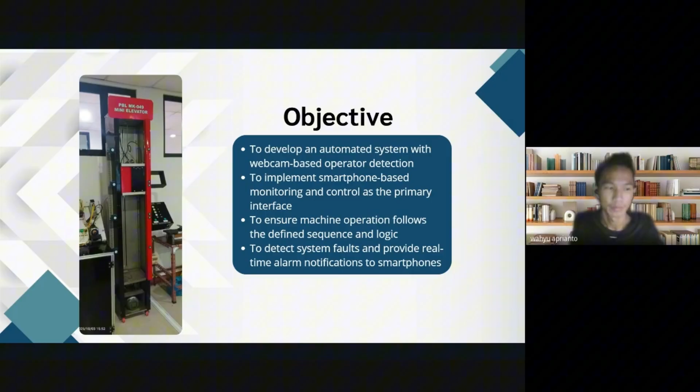Thanks, Wahyu. I'll be explaining the objectives we should achieve in this project. First, develop an automated system with webcam-based operator detection. Second, implement smartphone-based monitoring and control as the primary interface. Third, ensure machine operation follows the defined sequence and logic that have been calculated before. Fourth, detect system faults and provide real-time alarm notification to the smartphone.

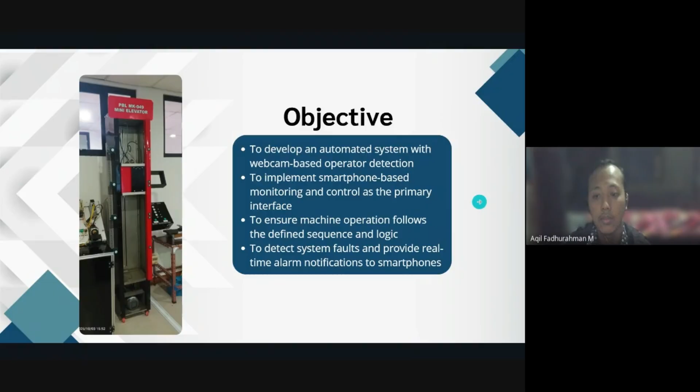Henry Rahmana is focusing on analyzing the existing elevator wiring system, identifying I/O addresses, and sharing his information with other members so everyone can support the PLC programming and wiring process.

Third, Mariana Ulfa Santi Safitri is focused on developing the machine vision system, specifically implementing face detection using the Haar cascade algorithm, which supports our first objective. Fourth, Wahyu Dwi Aprianto.

Wahyu Dwi Aprianto works alongside Henry in analyzing the wiring system and assisting with PLC wiring and system integration. Fifth, Dika Alfat Rizky was responsible for building the IoT environment using Blynk, ensuring the ESP32 could communicate properly with the PLC and smartphone interface.

Lastly, Muhammad Faras Hakim was responsible for testing the PLC program, especially for the elevator's up and down movement. However, during the project he participated in another event, which required me to temporarily pick up his task. In the end, Hakim still contributed well by helping with wiring and program testing. Okay, thank you, that's all from me.

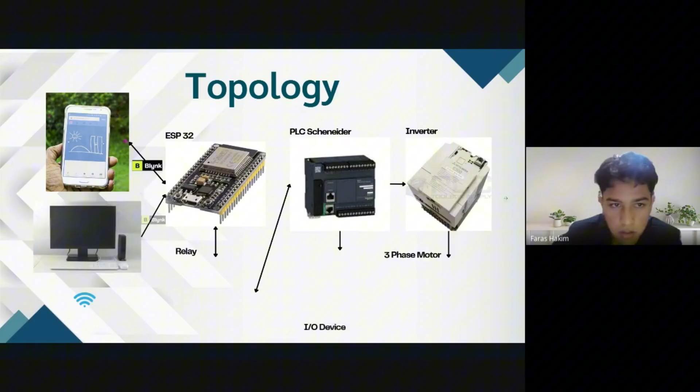Okay, this slide shows the system topology used in our project. The system is centered on the ESP32 as the main communication and control interface. The ESP32 is connected to the Blynk platform, which allows monitoring and control through both a smartphone application and computer via the internet.

The ESP32 controls a relay module, which functions as an interface between the ESP32 and the PLC Schneider. Through this relay, control signals are safely transmitted to the PLC. The PLC then processes input signals from I/O devices, such as push buttons and indicator lamps, and sends control commands to the inverter.

The inverter regulates the operation of the 3-phase motor, including its start, stop, and speed control. Overall, this topology enables remote monitoring and reliable industrial control of the PLC with efficient motor operation using the inverter.

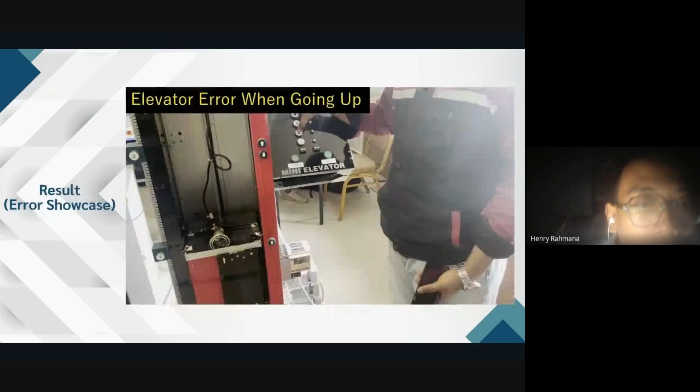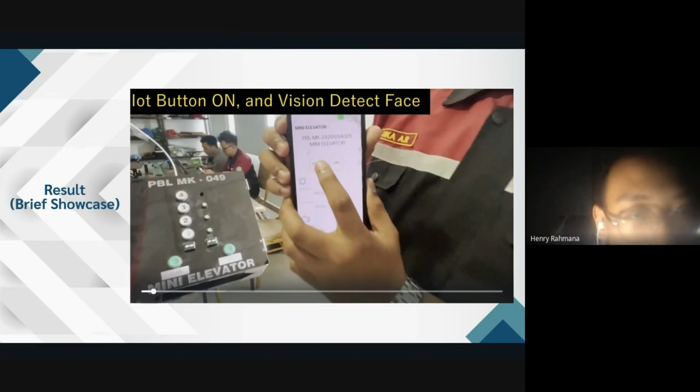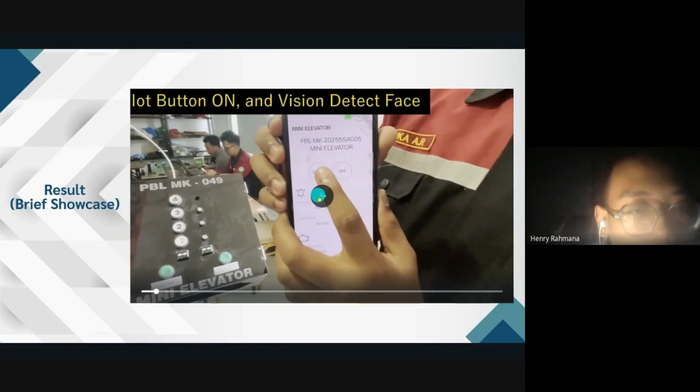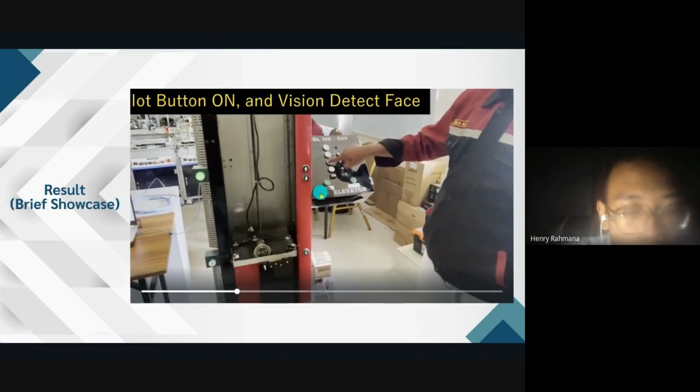Here we have to press the start button in the Blynk application, and then we have to detect the face of the operator from the webcam. If both of them are activated simultaneously, then we can operate the elevator in the control panel system, going whenever you want to the designated node.

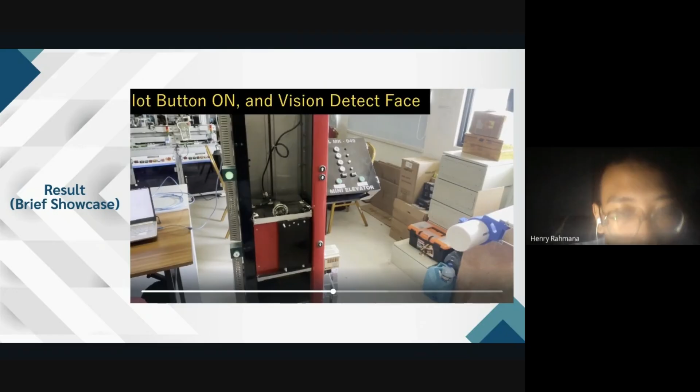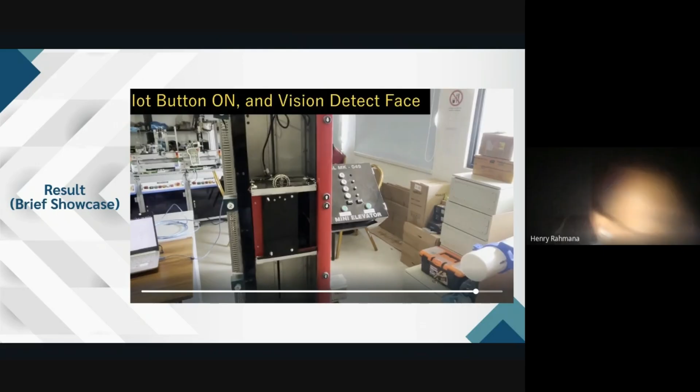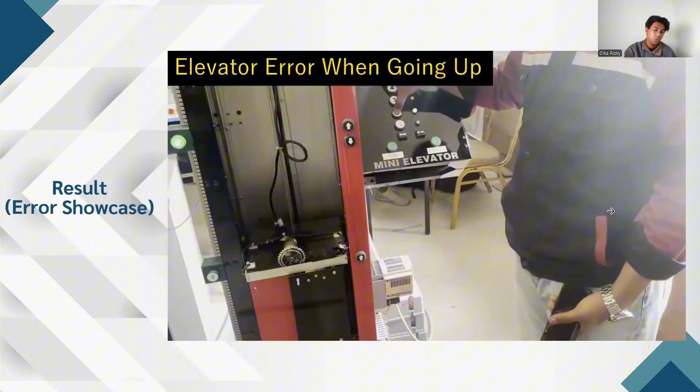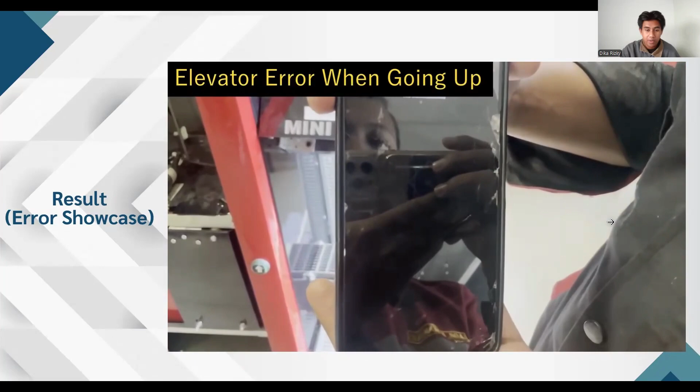This video shows an error condition in the mini elevator system. When the elevator is moving upward and suddenly stops or experiences a malfunction, the system will detect an error. A notification will be sent via the Blynk app to the operator's smartphone, and then an alarm will automatically activate as a warning.

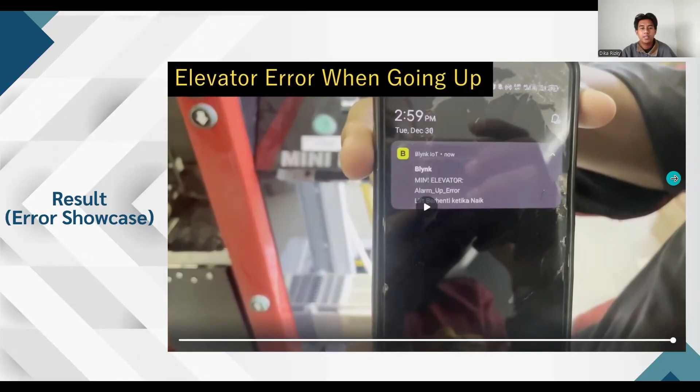With the system, the elevator can be monitored remotely, thereby improving the safety and reliability of the system. Okay, that's all for me. Thank you.

Okay, here I will explain about Crystal Machine Vision. We are using Haar Cascade, you can see the picture. The program is currently recognizing a person's face. The green box around the face shows that the system has successfully detected it.

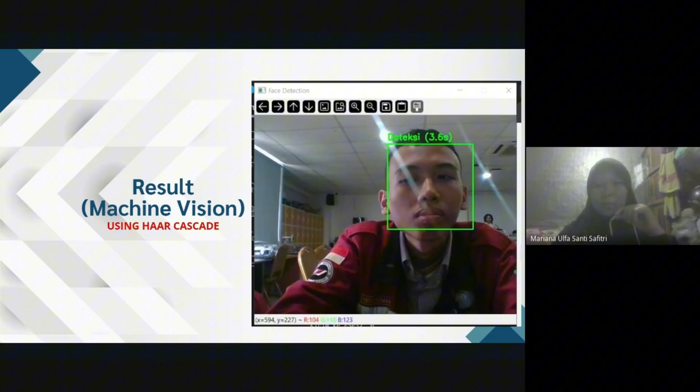You can see the text above, for example 'detection 3.6 seconds' shows how long the face has been detected continuously. The program considers a face detected if it is seen for more than 2 seconds, and lost if it is not seen for more than 4 seconds.

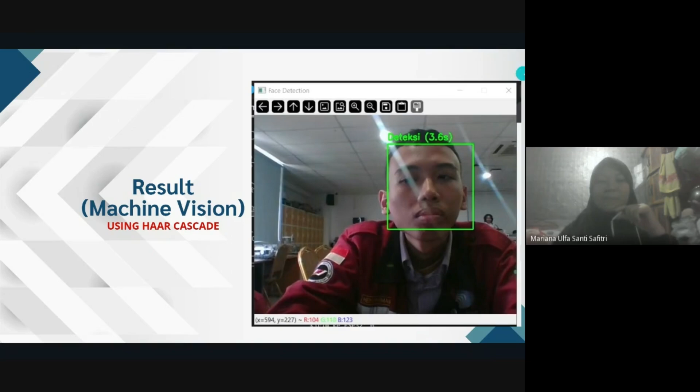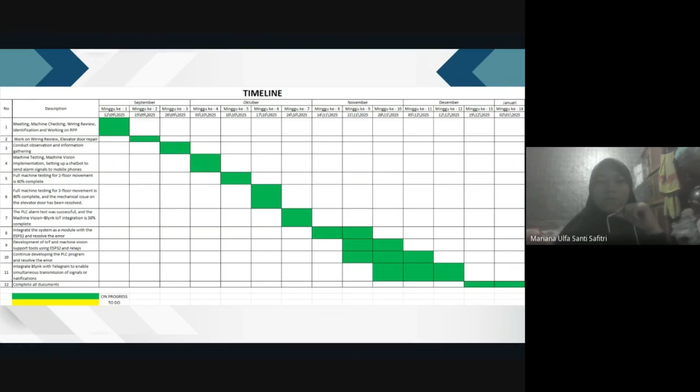The green bar shows which tasks are on progress. By looking at this chart, we can see the order of activities, how long it takes, and track the progress of the project. Okay, next slide please.

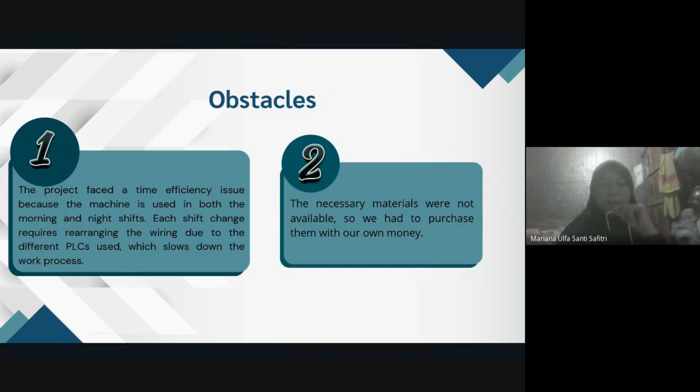Second, the necessary materials were not available, so we had to purchase them with our own money. Okay, that's all for me. Thank you, I'll pass back to the moderator.